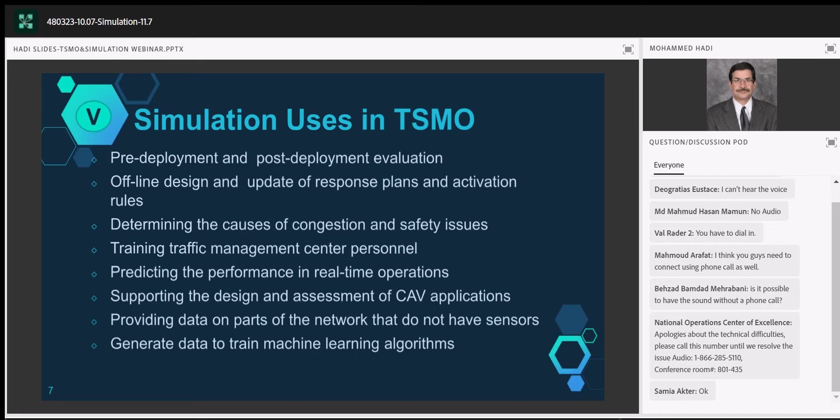If we do just machine learning based on current data from traffic sensors, we don't see a lot of things that will happen, especially with a new plan that's going to be activated, or a different network design. So using simulation to generate data is an important aspect of this.

But doing simulation for TSMO also has certain requirements and requires advanced methodologies. One need is multi-resolution analysis for projects where you want to look at the strategic behavior of drivers, diversion, and multi-modal shifts to transit, in addition to micro simulation at the operational level.

There's also a need for multi-scenario analysis. This means that in TSMO, the effectiveness of many strategies happens in incident conditions, bad weather, or construction conditions. So you want clustering analysis to cluster the conditions in the network, then do simulation for different scenarios to get a better feeling of the impacts of TSMO strategy.

Calibration of traveler behavior in general is important - important for other applications too, but it gets more complex when dealing with TSMO, especially with information systems, onboard vehicle units, and so on, where you want to determine how drivers and travelers react to these messages and information.

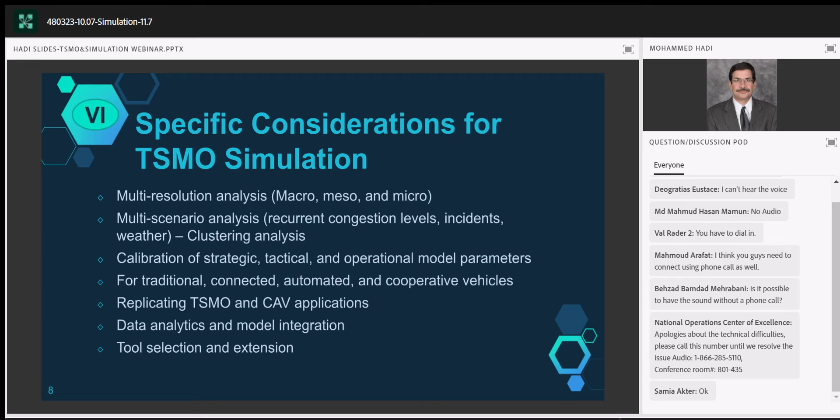And then we need data analytics and model integration. We also have to pay special attention to the tools we use to support our analysis in the right way. More and more, simulation analysis starts to get to an advanced concept, and in recent years has even started maturing toward mature applications.

These include software in the loop, where you can bring, for example, a controller firmware and install the software on the same computer and run the micro simulation model. Co-simulation - FHWA has been working on this, for example simulating cooperative adaptive driving automation with autonomous driving automation, with communication, with traffic simulation, so you can have 4 or 5 different simulation environments interfacing with each other.

There's also hardware in the loop - I'll show one example of what we're doing at FIU. And vehicle in the loop, where you can have vehicles either in the real world driving, interfaced with the simulation environment. Or human in the loop, where a driver sits behind the wheel of a car in a simulator or the real world, and you look at the behavior of that driver and the environment.

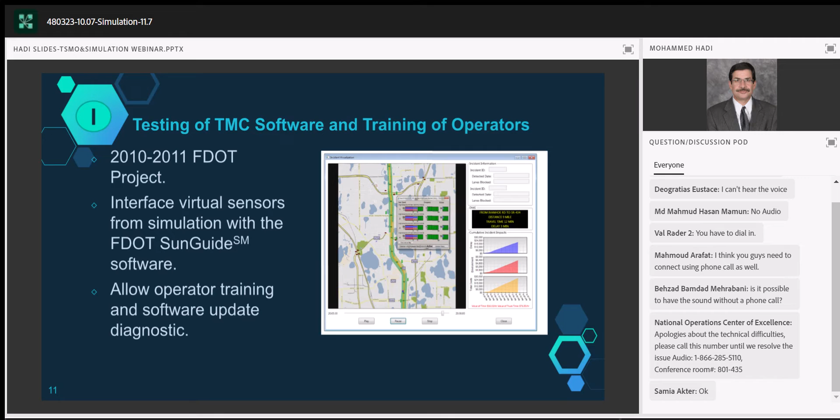Another objective was to show, when an incident happens, how much delay results, how long the queue grows, and what the impact on traffic is. The DOT project manager asked us to do this because they wanted to show their operators at the traffic management center that each minute or two or three minutes of delay in clearing an incident lane results in this much additional delay.

We've done a lot of projects on freeway management applications, two or three different ones, including real-time activation of ramp metering and variable speed limits based on the probability of breakdown. Before the breakdown happens, we determine the probability that a breakdown will occur in the traffic, given the stochastic nature of breakdowns, and then we activate ramp metering versus what would have been done by the system depending on a traffic operator observing the traffic. We compared the two and found the benefit of activating ramp metering using prediction, which could be based on machine learning or traffic flow theory.

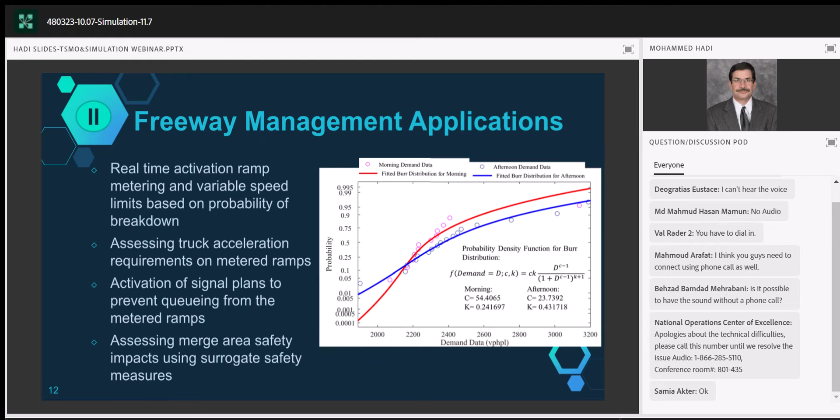This also involved acceleration requirements on the metered ramps—I have a slide on that—as well as activating signal plans when the queue backs up, and assessing merge area safety impact using surrogate safety measures.

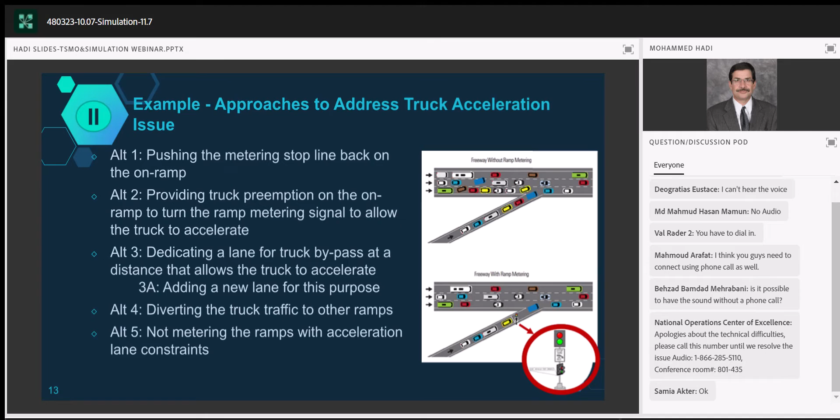This is an interesting application where the FDOT, again an FDOT project, was concerned about trucks. We had ramps with heavy trucks, and for ramp metering they were concerned about the inability of trucks to accelerate if we put the stop line in certain locations on the ramps. We had to calibrate the truck performance based on real world truck acceleration and power-to-weight ratio, and put that into the simulation model to reflect actual real world truck behavior rather than the simulation platform's default. That gave us the capability to compare five different options, including preemption for trucks, a bypass lane, or pushing the stop line back—this was before we even implemented the ramp metering, for Broward County, Florida.

We also had an application using signal timing plans during arterial events. We automated expert decisions using fuzzy logic and decision trees, combined that with high resolution controller data, fed it all into a simulation environment, and optimized the best option when there was an incident on the arterial, either lane blockage or urgent demand. That allowed us to compare different performance in terms of delay, queues, and throughput, and select the best approach for the facility we were looking at.

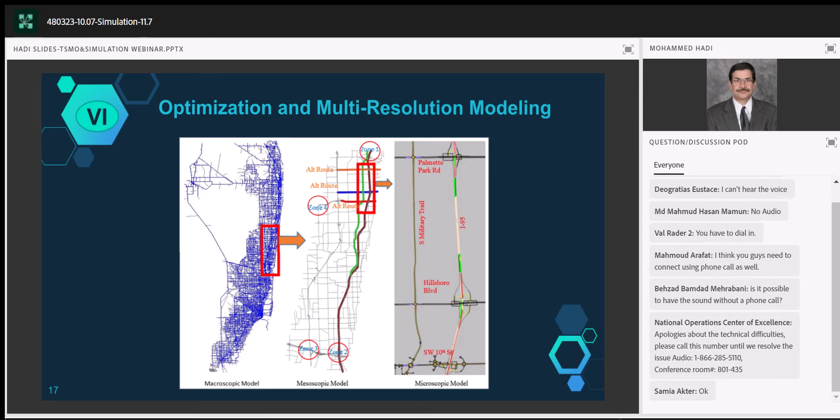Another project looked at diversion during freeway incidents. We predicted the diversion using machine learning based on data, combined that with simulation modeling to determine the impact on alternative routes, and activated special signal timing plans to see what the impact on alternative routes would be. We used multi-resolution simulation to confirm the effectiveness of the optimization.

This was developed for freight signal priority and transit signal priority. We wanted to look at both freight and transit signal priority on the same corridor. We first calibrated the simulation model's truck behavior to replicate real-world truck behavior, then ran simulation multiple times and fed the results into a decision tree machine learning platform, which gave us thresholds for when freight signal priority is preferred versus when transit signal priority is preferred, considering different performance metrics identified in the process.

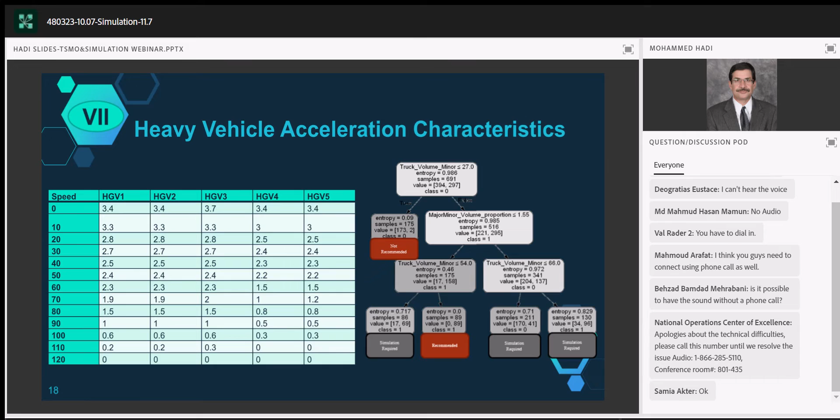This is another example of using machine learning in combination with data and simulation to support a certain application. We worked on the I-95 managed lane in Miami, and at one point the FDOT changed the toll on it, so we wanted to see if the simulation model could predict that.

Okay, I just want some water.

A simulation model, dynamic traffic assignment, can predict the shift between the general purpose lane and the express lane. We looked at the data before the change and came up with a model of driver behavior, how much they are willing to pay under different traffic congestion. Then we incorporated that model in dynamic traffic assignment and compared the results in the after condition, and we saw that the model is able to replicate very closely what was the shift in demand between the general purpose lane and the managed lane after the change was made by the FDOT.

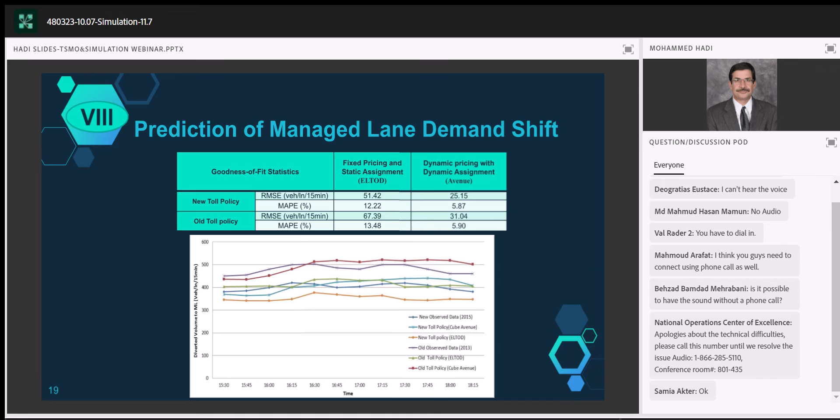So we were very happy that the model we developed was capable of that, because it's a challenging application.

This is connected vehicle-based red light violation warning application, and this is again one of our recent TRB papers. When we started looking at the red light violation warning using the microscopic simulation model, we were not able to find the benefit of the warning, because the behavior of the driver at the dilemma zone was not correct.

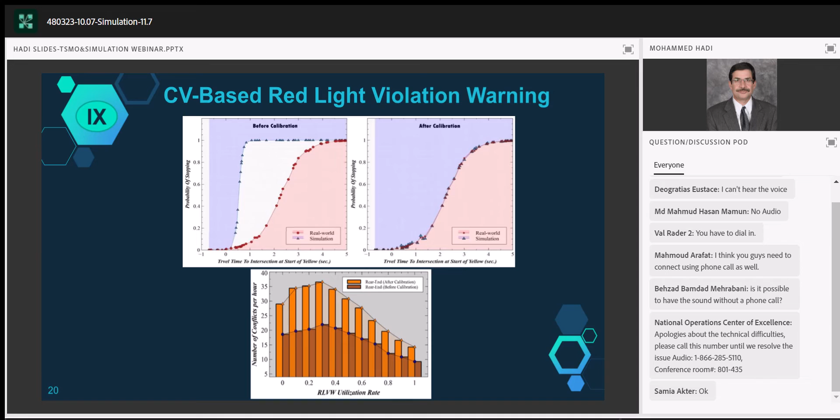But then we calibrated the simulation model based on real-world behavior, the distribution of traffic behavior at the dilemma zone. And when we did that, we were able to show the benefit of red light violation warning application under different conditions, in terms of reduction in conflict and improving the safety of drivers, and also the impact on traffic operation.

I mentioned that hardware, driver and vehicle in the loop simulation is becoming an important component of our analysis. Here I show a picture of our lab at FIU where we have that connection between the simulation and the controller and roadside unit. We think that more and more, as the application becomes more complex, we will need these integrated environments that can help look at the vehicle application, the controller application, and the roadside application in the right way, rather than just emulating their behavior.

So this is the last slide. I want to mention another project we are doing with FHWA on developing a traffic analysis capability maturity framework. I know the TSMO community is very familiar with the TSMO capability maturity framework, and considering the success of that, FHWA wanted to have that same type of framework, but applying it to traffic analysis, to improve the capability of agencies in doing traffic analysis.

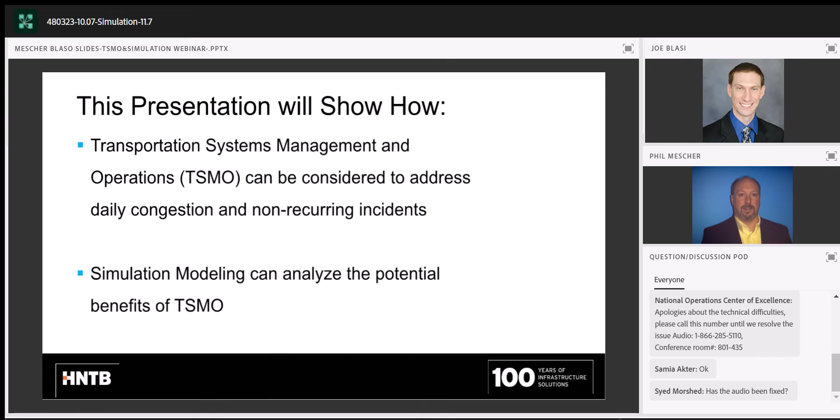Today we're going to focus on how we used simulation modeling to analyze the benefits of TSMO. Iowa's a fairly rural state, and we have congestion, though not quite like some of your big cities. Mostly it's different types of non-recurring congestion, about 70% of what we have in the state of Iowa, and our peak hours are very short, not even quite an hour in some cases. But we were happy to try to utilize simulation to look at how this could benefit us.

So a little bit about our corridor. This is a commuter route between two fairly large cities in Iowa. One is Cedar Rapids, population just over 250,000, and Iowa City is about 170,000. This is a very short corridor relatively speaking, about 16 miles between the two, and we have a lot of commuters going back and forth.

Cedar Rapids is more of an industrial type community. Iowa City is home to the University of Iowa and is well known for its hospitals. There's been a lot of development happening in between as well, so it's been very fast growing. We've jumped from about 38,000 ADT in 1998 to most recently in 2018 to about 63,000, which is greater than a 3% jump per year.

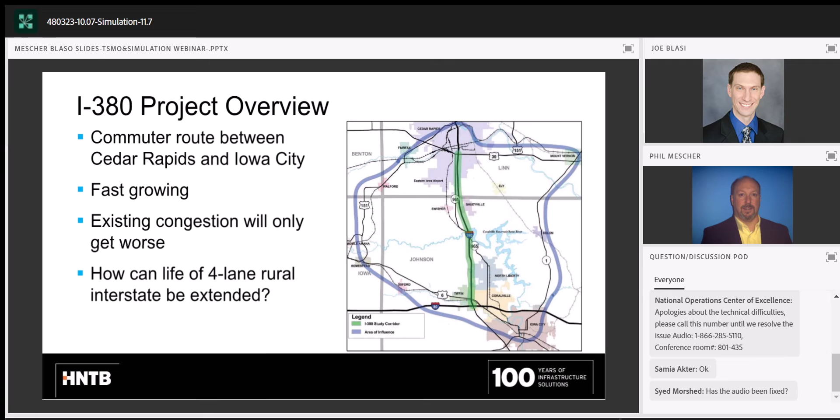So we've been monitoring the congestion. We know it's getting worse, and we were looking for ways to mitigate what's happening there. This is really a great test bed for how we could use TSMO strategies to combat some of that, and we were able to use simulation modeling to do this. We're looking at a basically 4-lane corridor the whole way between the two communities, so we're looking at how we can extend the life, at least capacity-wise, of this corridor.

What we were able to test is we looked both at freeway management and also arterial management. Freeway management really looked at a lot of dynamic lane and speed control. We do have a lot of times where we get queues that back up from slow-moving traffic, so we looked at some queue detection warnings. Even though this isn't quite your really solid urban type environment, we still looked at ramp metering, which was really good, and then hard shoulder running too, to try to temporarily expand that capacity for us. And then, of course, we looked at investigating crash sites too.

The arterial management was also just as important, so we have to deal with traffic signals and clearing out queues and things like that. The advanced and adaptive signal controls was something we really tried to focus on, and then there's emergency vehicle preemption—we do get accidents and crashes along this corridor. And then access management too, so local turn restrictions were something we tried to focus on quite a bit as well.

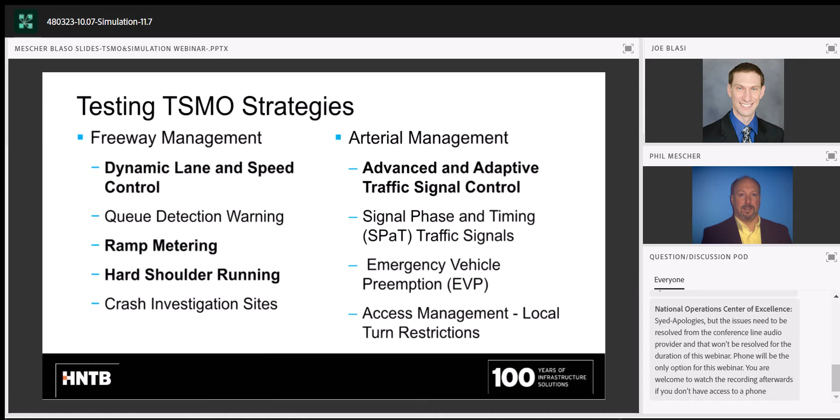So that's kind of an overview of what we looked at. I'm going to turn it over to Joe to actually get into the simulation details, and then I'll close out a little bit later.

Joe? All right, so...

I'm going to start talking about why the software we used was Transmodeler. Dr. Hadi talked a little bit earlier about different model fidelities and resolutions, and we wanted to leverage Transmodeler's ability to simulate in a hybrid environment. Transmodeler allows for microscopic, mesoscopic, and macroscopic fidelities.

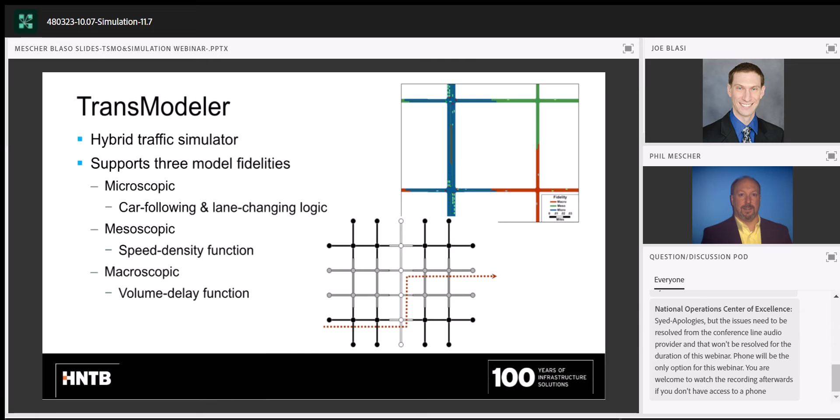By using a hybrid model, we were able to model a larger area and keep the computing time at a reasonable level. Also, Transmodeler has a TSMO module built in, so it makes it very easy to test certain TSMO strategies. Finally, we used Transmodeler because we were building this off of a TransCAD demand model, so there were some efficiencies there.

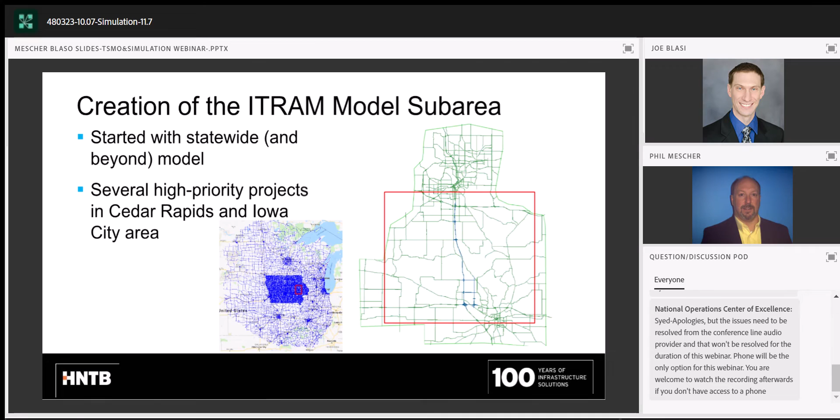Let's see, and like Phil said, we're going to focus in here on the I-380 corridor.

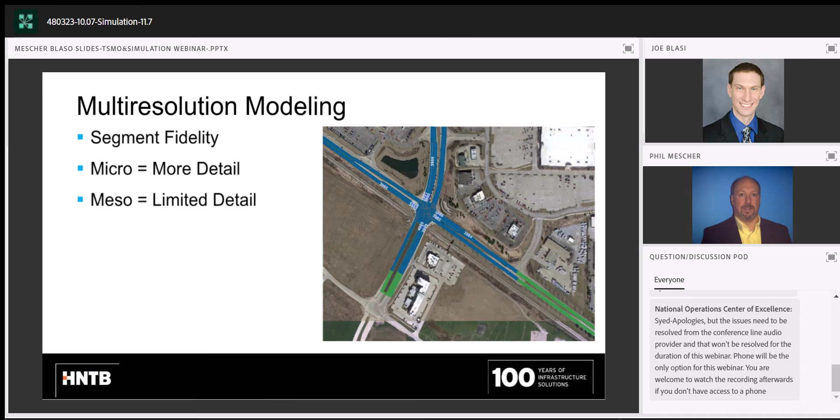I mentioned before the different available model fidelities. For this particular model, we focused on the micro and meso levels. Micro we used on the freeway itself, so we could get the full level of detail and look at the effects of the TSMO strategies. Then we used the mesoscopic resolution in other areas. We wanted to make sure we could still capture vehicle diversion around the corridor, but didn't want to bog down the model with all the computations. This is just showing a little bit of coding in the model, how you set the different segments to the different fidelities there. Okay, now the fun part.

This is when we got to test some of the different incidents we dreamed up. We developed two different incident scenarios: one was an hour-long scenario in the southbound direction of I-380, and another was a 30-minute incident in the northbound direction. For these tests, we implemented hard shoulder running only in one case, and another time we looked at hard shoulder running plus active lane management - meaning the green arrow you see over the sign in the image here, and the variable speed limits you can also see on the sign.

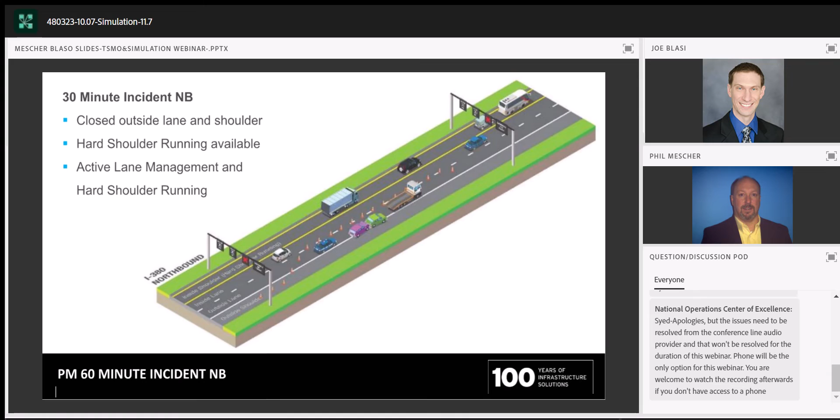I'm going to jump into detail on this 30-minute incident in the northbound direction that we modeled. More specifically, we closed the outside lane and the shoulder for that 30-minute duration. We allowed for hard shoulder running on the inside shoulder, and then, like I said, in one scenario it was just the hard shoulder running, but in another scenario we implemented active lane management as well. Now, Nilu, if you could switch over to the video, please.

I'm hoping this isn't too choppy for you all. I'm going to walk through some of the screenshots or video from the actual simulation here. We start down at the south end of the I-380 corridor at I-80, and quickly here we're zooming into the start of the hard shoulder running lane in the northbound direction.

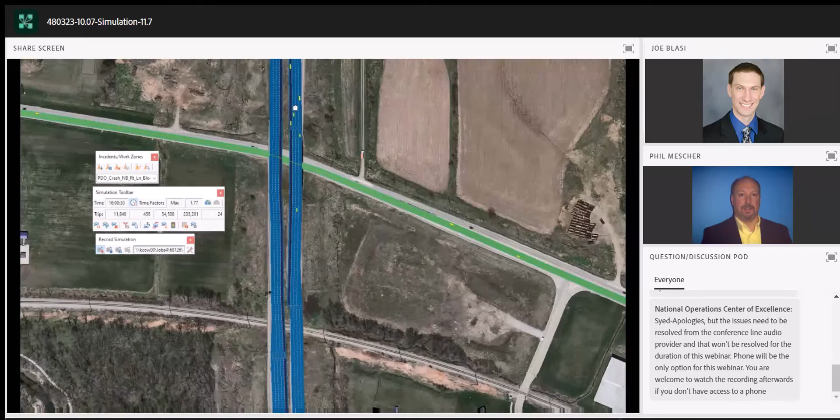The darker blue color on the inside shoulder, that's the hard shoulder running lane. You can see the time in the simulation toolbar just crossed 4 o'clock, and you can see the vehicles now starting to use that hard shoulder lane, which we turned on at 4 o'clock.

Here we're seeing the actual incident area showing up in red. At 4:15 the incident begins, and you can see the vehicles now starting to move over to the left and use that hard shoulder lane to get around the incident. You can see the queues starting to back up.

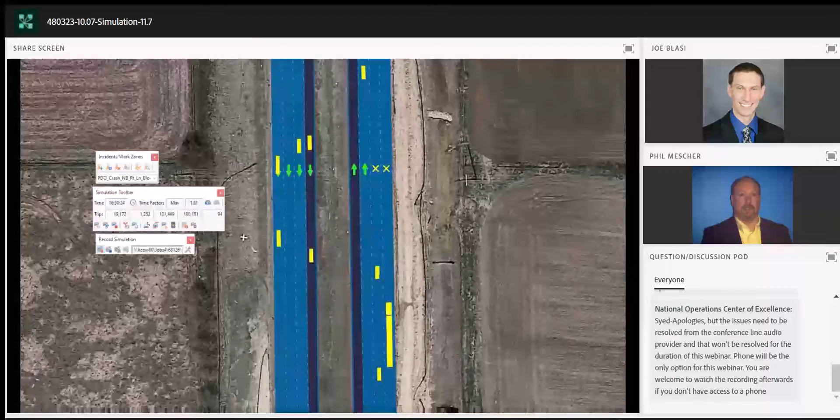Here you can see we've zoomed out a little bit, and queues continue to back up. This is showing the active lane management with the two inside lanes open and the outside two - they're trying to get traffic out of it. And here we have some ramp metering going on the upstream on-ramp.

Now here it's almost 4:45, we're about to clear the incident. There it goes. And then you can see all the vehicles - you kind of open the floodgates and let them go, and you start to see the queues dissipating. Now here we are back at the south end.

All right, so here are some of the results that came out of that model run. Across the top we compared our future no-build - we also ran the incident with the lanes out there today, no hard shoulder running - and then we ran it with hard shoulder only, and hard shoulder plus active lane management. Down the left side you can see some of our MOEs: level of service, we looked at four different segments along the corridor. The incident was placed between I-80 and Penn, that first row, and the other segments are the downstream segments after the incident. Then you can see VMT, VHT, et cetera, and some travel times.

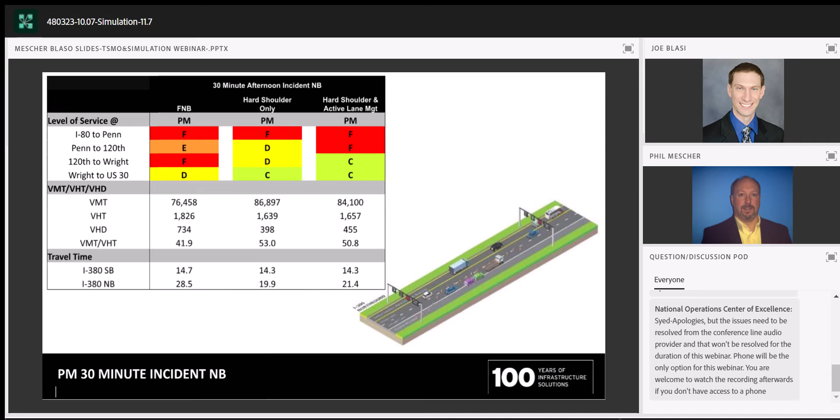I mentioned VMT and VHT, but I want to highlight the travel times. You can see the northbound I-380 travel times, we saved about 10 minutes with the hard shoulder running scenario.

Here's another way of looking at the data, a heat map of the densities along the corridor. Up and down are north and south along the corridor, and left and right are times. With the future no-build, you can see the big red blob of congestion that builds up behind the incident, and then you open the floodgates and see the higher density downstream after the incident. With hard shoulder running and active traffic management added, you can see you're really helping the congestion. It doesn't go away, but it helps. With active traffic management, you can see that little tail on it after the incident, and that's due to the dynamic speed control.

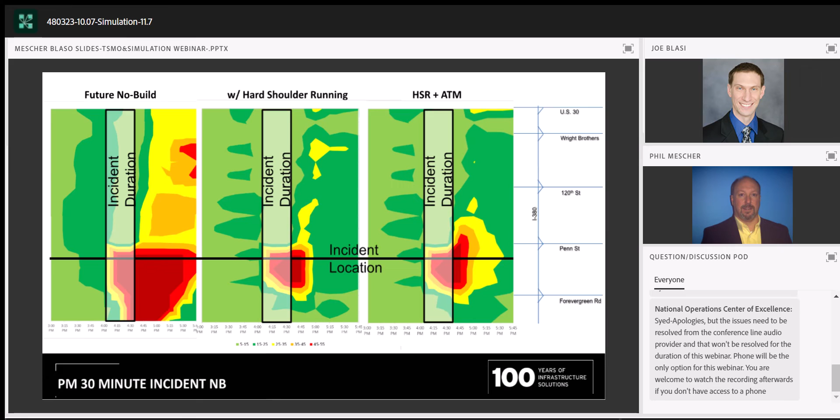So I'm going to turn it back to Phil real quick to talk about what we did with these results once we had them.

Great, thanks Joe, appreciate that very much.

Obviously we do this analysis so we can figure out what we're going to do with this corridor. We definitely learned that the simulation was a great tool to show us what the TSMO strategies would reveal for us, and there are definitely some benefits there, so much so that we have more TSMO or integrated corridor management studies ongoing now. There's one in Des Moines, our capital city, a huge study where we're looking at a lot of different TSMO strategies.

With this corridor though, as we started to take a much deeper look, we have some asset conditions we have to take care of. Pavement condition has really been struggling, this is probably mostly original pavement from the 1980s when this corridor was initially constructed as part of the interstate program. So as we looked at this, we determined that we're still probably going to need to do quite a bit of reconstruction, and looking at the costs, it really makes sense. So at this point it looks like we're going to reconstruct the six lanes.

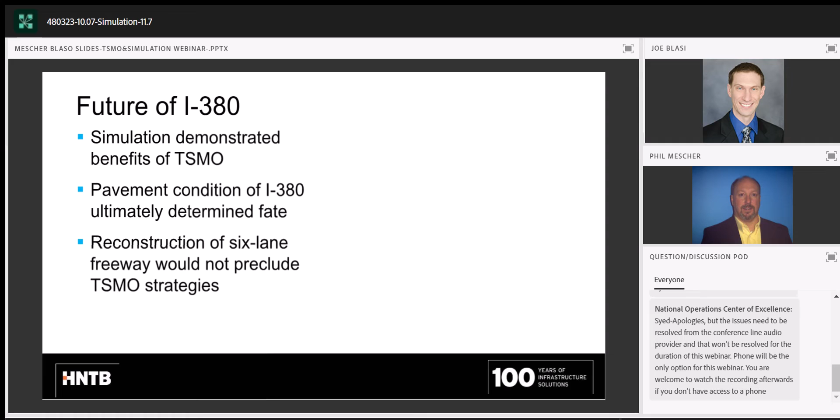However, as traffic keeps growing on this corridor, this certainly does not preclude any TSMO strategies from being implemented along this corridor. We're also going to look at the downtown area soon, across 380 in the town of Cedar Rapids on the north end. I'm sure that's probably going to have some really good strategies and opportunities to look at what TSMO can do for us and use simulation to do that. So lots to look forward to here in Iowa.

That's all we have for you today. Appreciate your time very much.

Thanks Phil and Joe, great presentation.

I'll start with the challenge that we had at hand. The challenge was that we have a section of I-95, a very big section near the Fredericksburg area, starting between Richmond and Northern Virginia, which has very complex travel behavior and a mix of commuters with long distance travelers. It has high density, it's very incident prone, along with very high unreliability. This is also the corridor traveled by a lot of senators and Congress people and everybody, so it's a very high visibility and often complained about section.

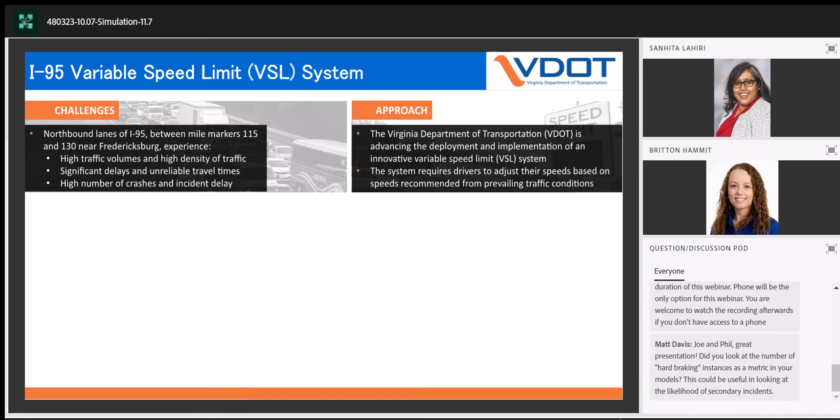So we have studied this section for quite a bit. Then finally we came to the conclusion, after studying the patterns of speeds and volume and all that, that variable speed limit would be a good strategy to implement in this section.

So the way we decided we would do this was we did an extensive search in other areas in this country where variable speed limits were being implemented, and what were all the challenges in those areas. We quite didn't see any parallel to what we were trying to do here, or even the challenges we had here in this I-95 corridor section.

So basically what we had to do was build our own algorithm based on the speeds here, and based on the volume and the volume density and all that here. So we basically had to create our own algorithm.

That's one part. Then the other part is actual deployment: how all this data would be collected, handled, and then, of course, tested so it doesn't create more problems than it's solving when it gets deployed. So there are lots of pieces to all of this.

And then, of course, continuous monitoring, looking at other things like return on investment, how on the first day of deployment drivers don't quite know what to do about this. Over a period of time, how is the compliance and things like that? So there's lots of considerations and pieces to this.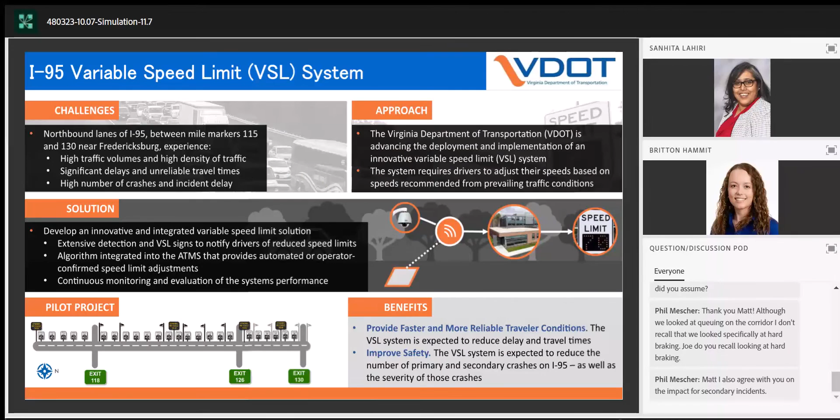So we actually decided, instead of taking this very big, long section, to do a pilot project for a 15-mile section. And that's the section you're seeing there. Hopefully the benefits that would be realized after that are faster, reliable travel times, and of course improved safety, as we have a lot of both primary and secondary crashes in this section.

So how would we do all of this? We would kind of have detectors placed at strategic locations, and often enough, so they would collect this volume and speed data at 30-second intervals, because all this would happen on a real-time basis. So they would collect data at 30-second intervals.

And then this data would get crunched through the algorithm, and recommendations for speed would go back to the field, and then they would update the signs. So those are the stepwise stages: derive the traffic conditions, go through recommended speeds, and finally there will be posted speed limits.

And then we would have periodic updates of this. There are also guidelines based on how the smoothing of this can be done, both spatially and temporally, of these posted speed limits.

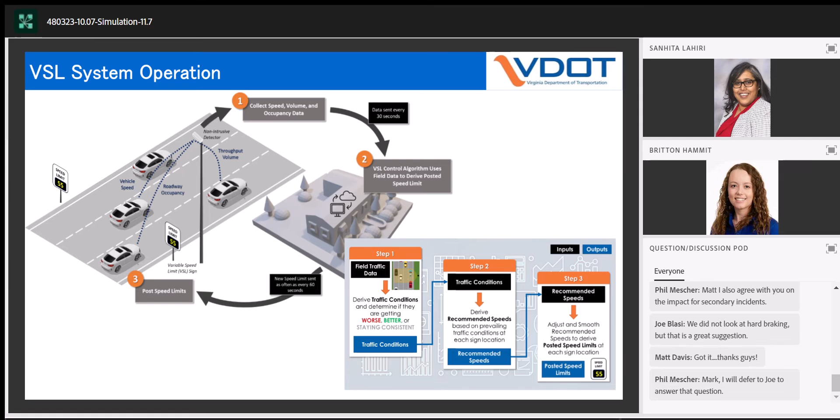You can't change it too often, or too fast between the signs, because it takes a little bit of reaction time for the drivers to absorb all of this information and then react to it. So this is how the basic concept is supposed to work.

And then, of course, the results - what are we getting out of this? And then the continuous maintenance and update of this, to test the effectiveness of how the algorithm is working. Do we need to tweak some of these things, because this has not been deployed widely, even though there are certain guidelines set for how often you can update some of these speeds?

Whether it is effective or not - and then, of course, Virginia has seasons, like there might be snow on the ground at some point in time. Is it effective then? How is weather impacting it? How is visibility impacting it?

Some of those, we might not have data at the granularity that we wish, and then how to absorb these multiple types of data and bring it into the system so that we can make an informed decision out of that. And based on that, calculate the posted speed limit and then bring it back to the drivers. So lots of things happening.

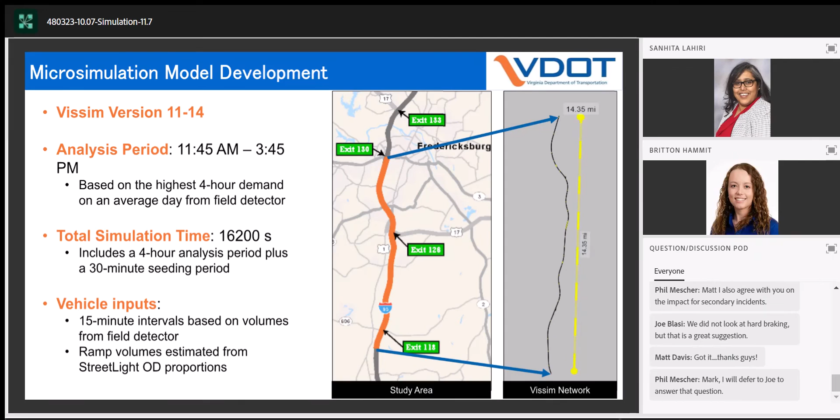So what does our model look like? We created a VISSIM model in VISSIM 11, representing a 4-hour analysis period determined from the highest 4-hour demand on an average day. We collected field data and created this baseline model, coding it with vehicle inputs updated every 15 minutes based on collected detector data, and ramp volumes estimated using StreetLight data.

A VSL site is comprised of vehicle detection and speed limit signs. So in the field, that's what a VSL site looks like, and our goal was to create a VSL site that was as equivalent as possible in the simulation model.

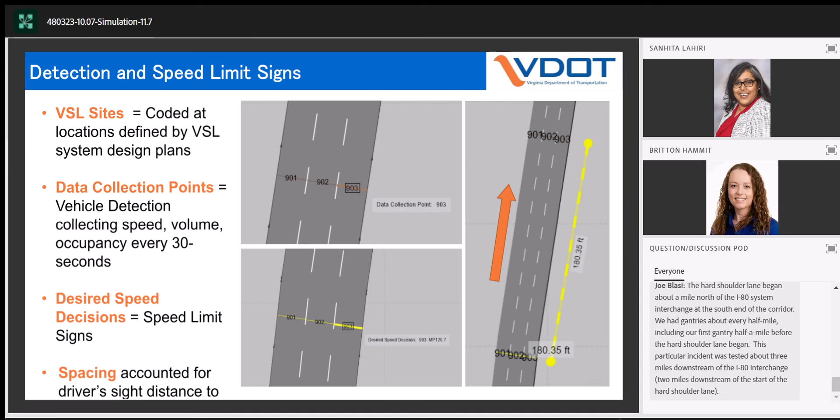All 24 VSL sites were represented in their approximate locations based on our actual design plans in our VISSIM model. Data collection points in VISSIM were used to collect lane-by-lane speed, volume, and occupancy at 30-second intervals to reflect the Wavetronix detectors deployed in the field. We used desired speed decisions to represent speed limit signs, and we played around a lot with the spacing of data collection points and speed limit signs to represent a driver's sight distance to those signs.

We used field data to create the baseline empirical speed distribution with the baseline speed limit of 70 miles an hour. So we gathered existing field data and created this baseline speed distribution.

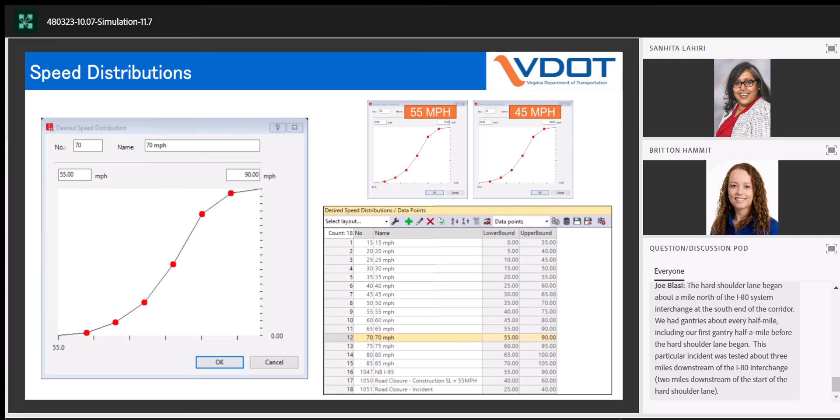However, another challenge we ran into was how to select a speed distribution for a lower speed recommended by the algorithm when it changes speed based on a downstream congestion event, for example. This is a challenge because we don't know how drivers will react to the speed postings prior to deployment. So we tested a number of assumptions, including using a mirrored distribution to match the 70 mile an hour field empirical distribution, but adjusted according to the new posted speed. As shown in the images, for 55 and 45 miles per hour, we have the same shape of distribution, just consolidated based on the actual posted speed limit.

Similar to our previous presentation, we wanted to make sure we represented a few different congestion events or road closures. We created a number of road closure scenarios resulting in congestion along the interstate corridor. For our baseline model, we coded 3 different closure locations with 1 and 2 lane closures on the right and left sides of the highway, to test a variety of scenarios.

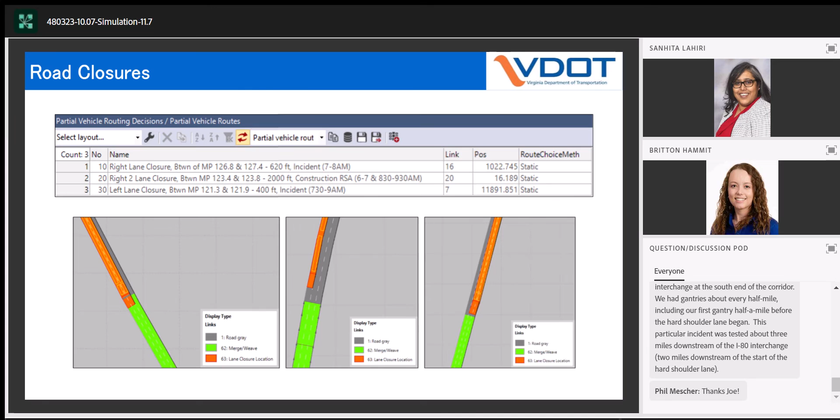In VISSIM, we coded these lane closures with overlapping links and partial routes, allowing us to activate the road closure only for short periods throughout the 4-hour simulation. In the images shown, the orange lines represent where the lane closures occurred, and the green lanes represent merging and weaving links with dedicated behavior types to ensure realistic lane changing behavior occurred with these road closures.

This model was not calibrated in the same way as many of our large traffic analysis models are typically calibrated, due to different modeling objectives as well as lack of available data for full calibration. However, we made a few tweaks to the driving behavior from the VISSIM default to more accurately reflect lane changing in particular. We wanted to make sure these congestion events we were testing our algorithm on were as reflective of real conditions as possible.

As I mentioned previously, freeway merging and weaving behavior was created by adjusting car following behavior, as well as some of the cooperative lane changing behavior and deceleration thresholds.

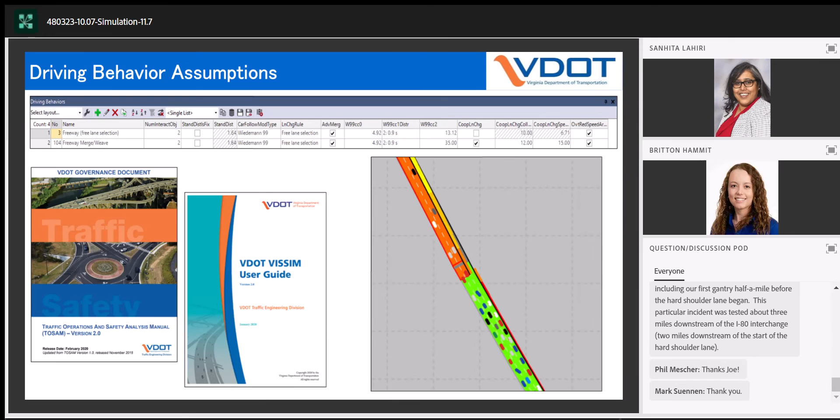While we didn't have field data to specifically inform what those driving behavior changes should be, we did use guidance developed in the VDOT TOSAM as well as the VDOT VISSIM user guide and VISSIM 11 evaluation, which all really contributed to a better understanding of driving behavior in these models for the Virginia region. So if you haven't checked out those resources, I definitely recommend you do so.

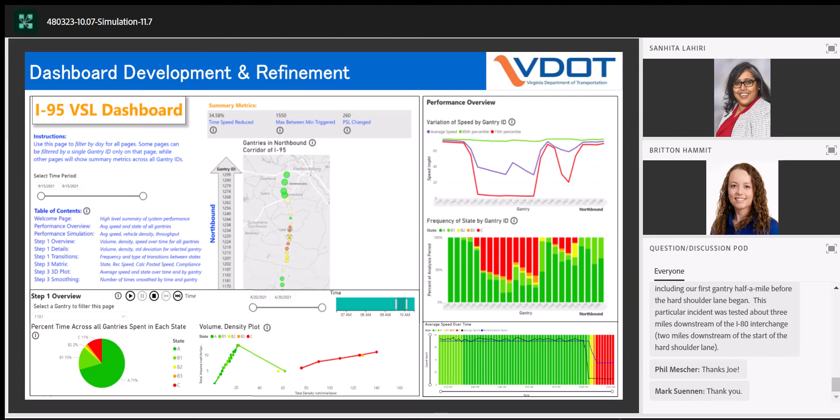This has given us a huge benefit to advance development of some of our software tools prior to field data being available. It's also given us substantially more time to refine these, get feedback, and go through that procedure.

At this point, Nino, if you're able to share the video, I want to watch this really quickly. The development of this dashboard with simulated data has given us tools to better explain how the system is going to operate. This performance simulator that we're going to see on the screen was taken from our dashboard, and it depicts the simulation and algorithm data aggregated every 5 minutes.

What you're going to see is that every 5 minutes through our 4-hour simulation, there are slight changes. On the top graph, we have the average speed traveled by simulated vehicles, and the black line is the actual posted speed limit. We can see how the average speed we're projecting changes in relation to the calculated posting speeds, and when average speeds reduce, that's because of one of our lane closure locations.

In this graphic, the x-axis represents the corridor: the left side is the south end, the right side is the north end. So this shows the progression of traffic from left to right as drivers navigate from the south end to the north end of the corridor.

We also see at the bottom the changing dots. These show various states of traffic: green is good, free flow; red is bad, congestion. The size of the dots represents the density—as the dots get bigger, we have a more dense segment.

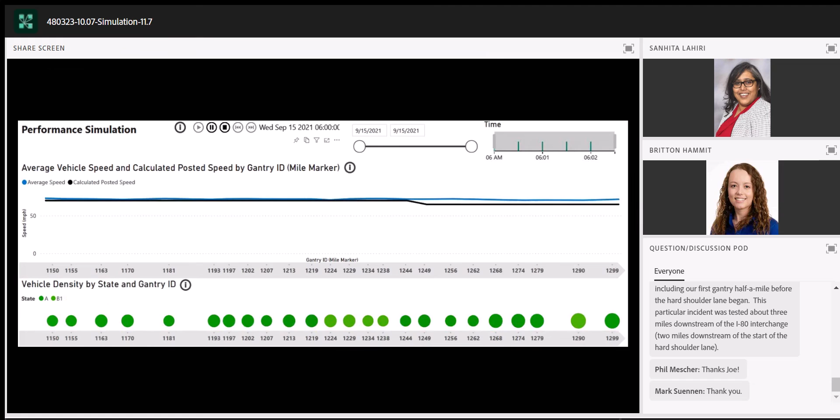Some of the things this has been really helpful to see is that the algorithm is effectively predicting various components—we're ahead of drivers when they need to reduce their speed, and we're ahead of drivers when they need to increase their speed. That gives us a lot more confidence in our algorithm even before we test this with field data, and it's given us the ability to go through all of these testing procedures prior to field deployment.

So we can go ahead and switch back to the slides.

So this simulation testing environment not only allows us to stress test the algorithm with realistic traffic data in the near exact configuration that it will be deployed, but it also gives us the opportunity to evaluate system performance, to anticipate the benefits of the system and how those benefits may change under different conditions.

We're also reviewing the impact of compliance on the system. We're trying to answer the question of how much compliance is really needed to maximize our system benefits. So for this analysis, we're reviewing high and low compliance rates by adjusting various vehicle types in VISSIM to represent different distributions of drivers following various posted speed limits.